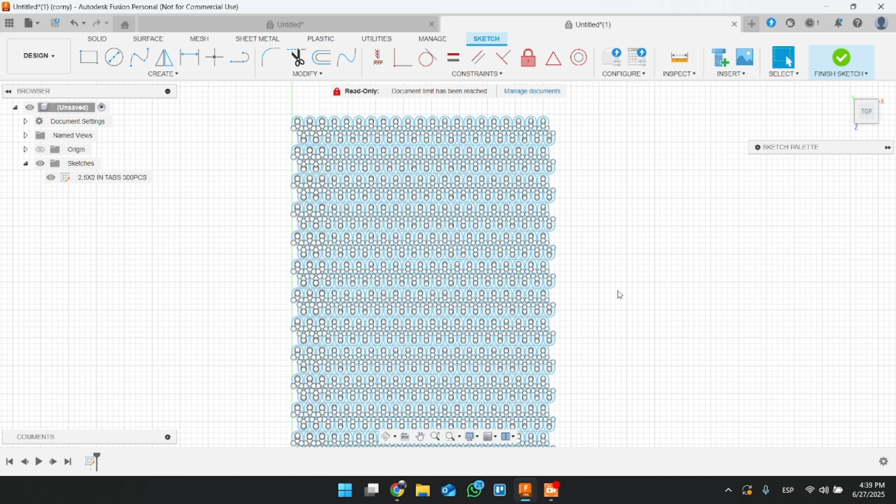In this video, I'm going to explain how to move a file from Fusion 360 to SheetCam so you can post-process the file to prepare it for the MASSO. It's fairly simple. There's a few steps, but if you follow it step by step, it's rather simple.

So I have some tabs here that I'm going to cut out. Right here we got our part. Obviously, at this point, you probably have some experience with Fusion, maybe not. If you don't, then you're going to want to go back to a video showing the basics.

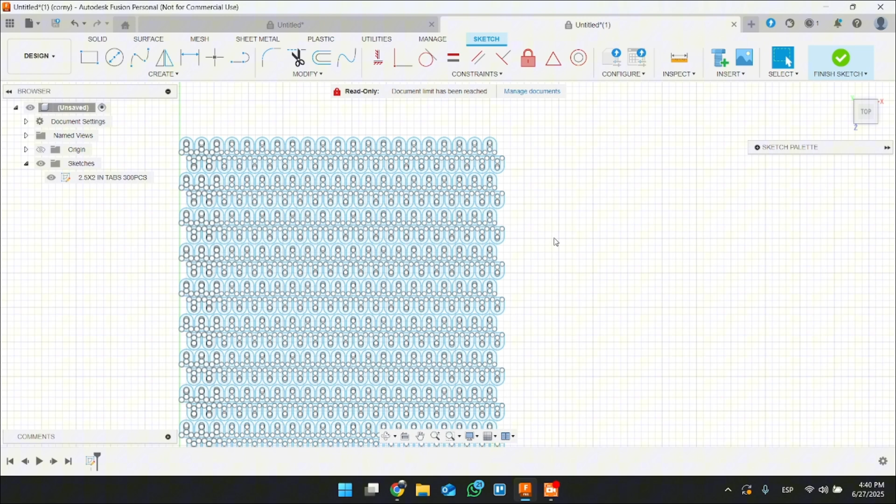On how to make parts in 2D for plasma cutter. So here we have some tabs that I'm going to cut. What we're going to do is we got them ready here. So we're going to right click on the part, on the sketch, and then hit Export DXF, and then click OK.

Project your points, so you want to use the points or not. I'm not going to use any of the points, I'm going to unselect that. Click OK. You're going to want to go to your folder wherever you have it. I have mine in CNC Plasma DXF files with a name. I actually have this one saved already, but let's just do it again.

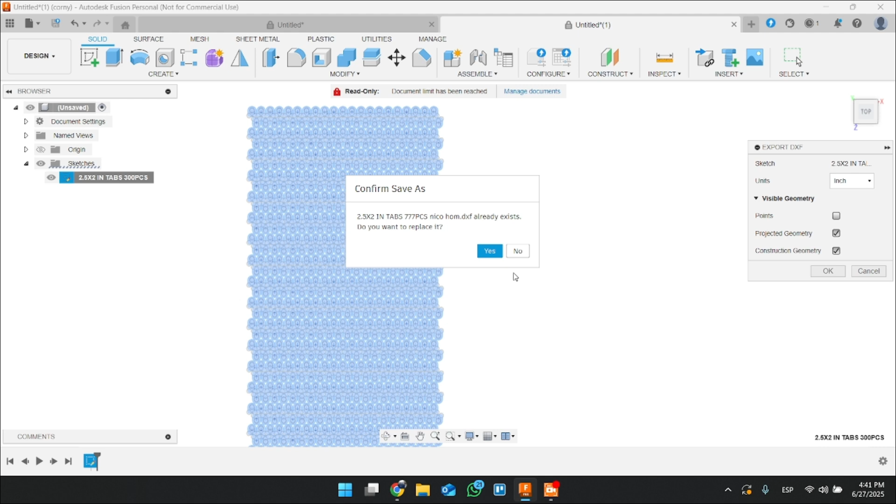This is 777, this one right there. And you're going to hit save, and hit save over here. It's probably not going to say replace on yours, but I'm going to hit replace. And we're going to go out of this one.

And then we're going to go to our SheetCam to show you how to import a part to SheetCam, your DXF file, and post-process it through SheetCam for the MASSO CNC plasma table, tube cutter, or pipe profiler.

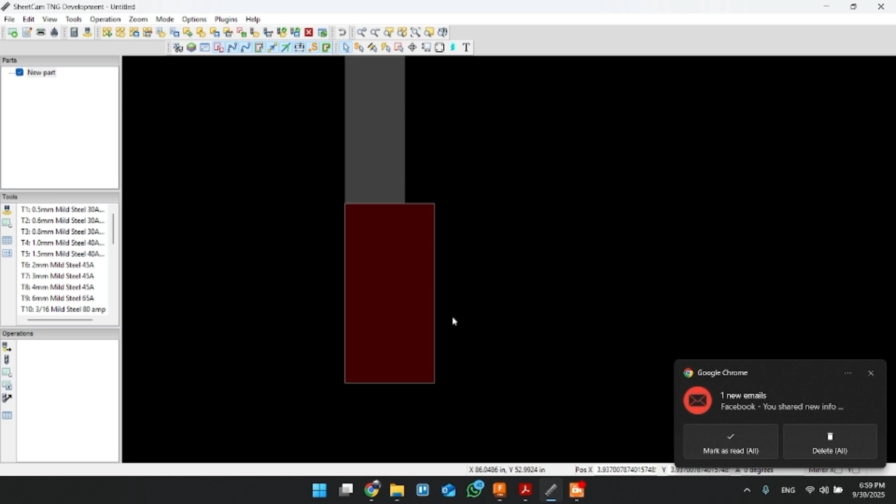What you're going to do is go to File. If you already have a job in here that you want to delete, just hit New Job and then click No if you don't want to save it, and it'll delete it. And you're going to go to File, New Part.

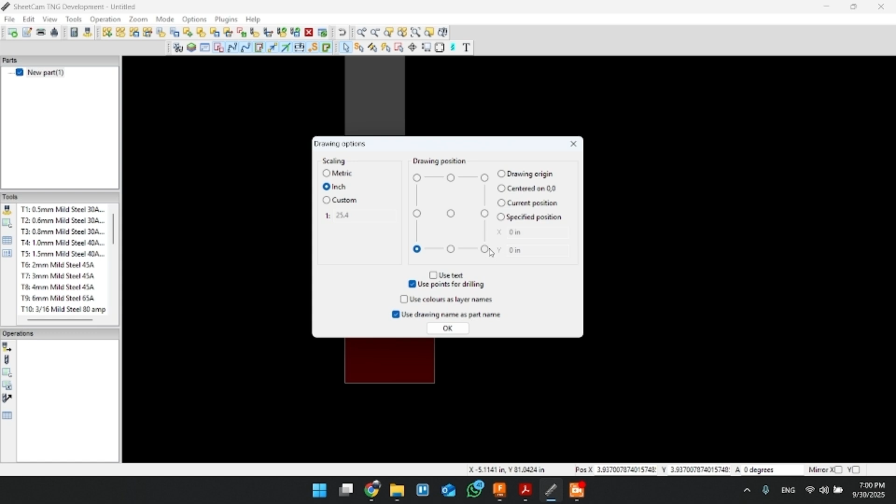Let's just pick that, hit Open. I want to make sure it's in inches, and this is the corner I'm going to start at, the bottom left corner. You can start on this side or wherever you prefer. Hit OK. There you go, I have my parts imported.

Now what I want to do is go down here to Operations. Left click that. Make sure we have MASSO default rules, you always want to make sure that that's there. Then you're going to select the tool you want to use.

So I'm going to be using, let's just say, 3/16 mild steel 80 amp. And then it sets the speed automatically. You can also go in here, if you don't have all these tools set, it's fine. You can check your book and reference it and just make sure path rules are there.

Touch off feed rate should be at least 150 to 200 between there. Cut volts at 0 - if you have this at 0 for the torch height controller, it's just going to use the piercing height to control the torch height controller. So I usually leave it at that.

It's easy to do, and you can use the lead ins over here. You can turn them off, but I like to have them on. You can make these longer, 0.5 if you want to, or 0.15 - make the lead in bigger that way so it won't cut your part when you're doing holes or something.

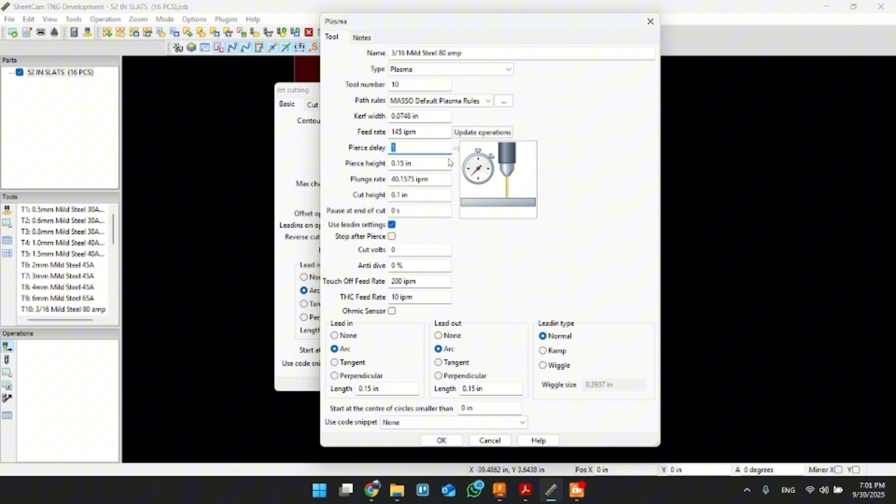The piercing delay is pretty important, so you got to check your chart for what that says. Kerf width, plunge rate, all that's fine. Cut height, I like to have it about 0.1 to 0.15, whatever that also you can check on your chart to see what's best for you. And we're going to click OK.

Make sure that MASSO default plasma rules are on, your rules should be on the left in here. If you haven't done that yet, go back and import all those rules, make sure they're all set up, otherwise your torch height controller won't work properly. If you don't have a torch height controller, you can ignore that part.

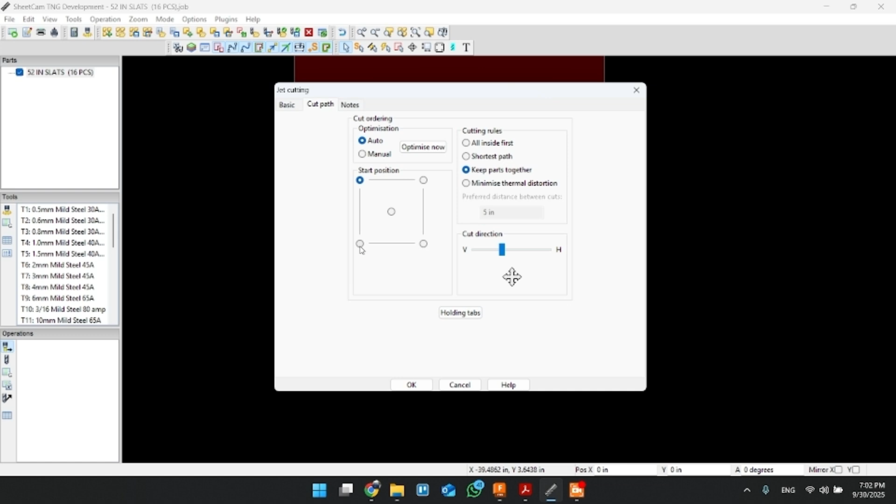And for the cut path, I'm going to start down here. So I'll click OK. There, it's processed now. It's going to go there, it's going to go to the part. I think over here is the next one.

So the next thing you might want to know is on here, edit start points. You can click that and then go back down above here and right click on your mouse. And we can do a quick cut sequence.

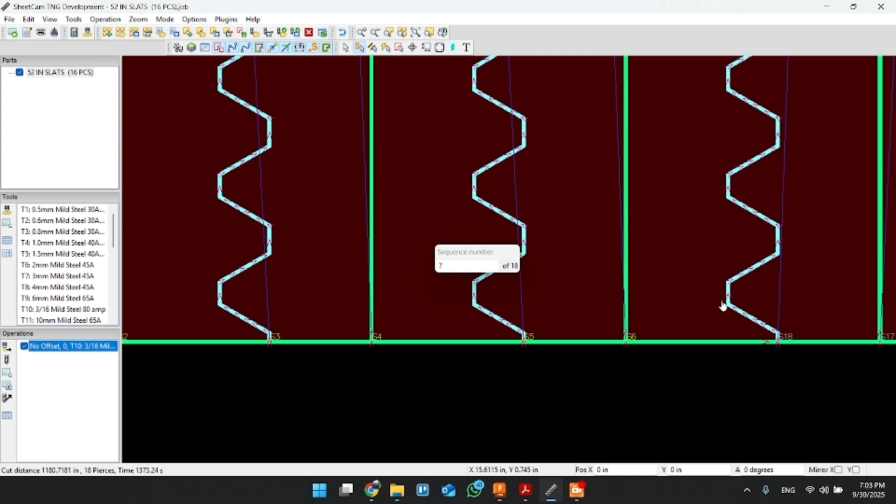On this one, we can set the sequence of however we want the parts to cut. Let's say if we want to cut in a row like this, you can click where the start points should be. You keep going, get them all set up wherever you want, whenever you're done, or you can skip one if you want. Whenever you're done, just right click and sequence, and then you're done.

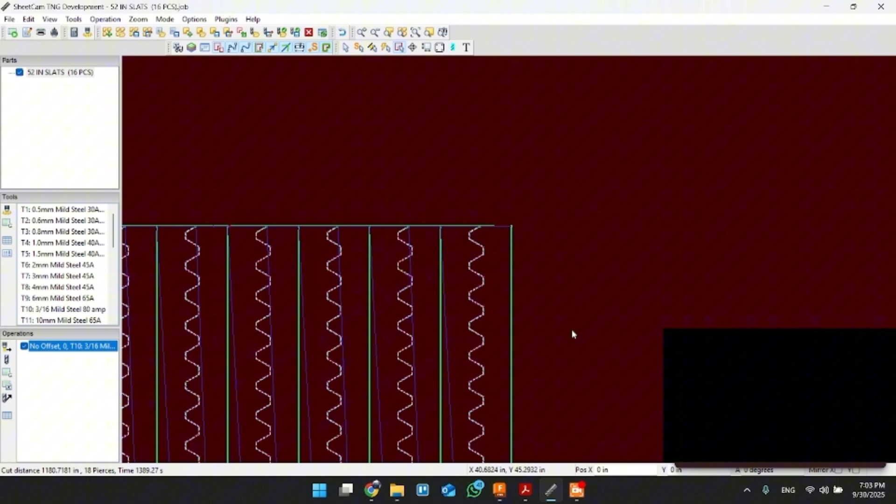Also, on edit contours, you can even use that to delete. You can slide over a part, right click, and then hit delete. Okay, it's not working right now. I might have to cover the whole thing. Let's try that - right click, delete. There you go, you have to actually drag over the whole piece to delete it. So you can delete that.

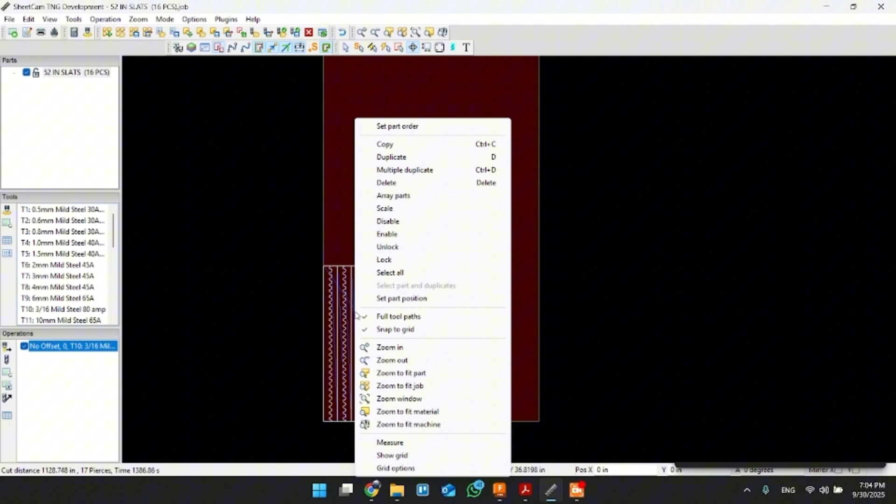And once you run this, you want to array the parts if you want to do more than one. What you can do is hit the nesting button, then right click. So you hit this nesting button and go down here to your part, right click, and you can duplicate it or whatever. If you want to just slide it like that, you can do that.

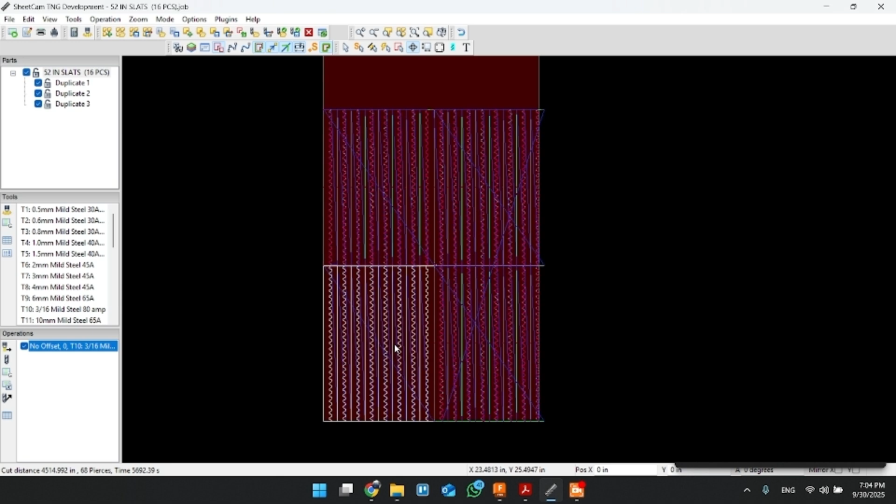And another option on nesting is right click, you can array the parts. So if you want to do, let's say, 2 parts, number of rows 2, and number of columns just 1. We can also do two columns, two rows. You can hit that, and it'll array the parts.

Let's hit that again and hit array. And then over here you can set how much space you want between the parts. I like to have them at least 0.2, otherwise it'll start messing with my other cut. You can change that however you want.

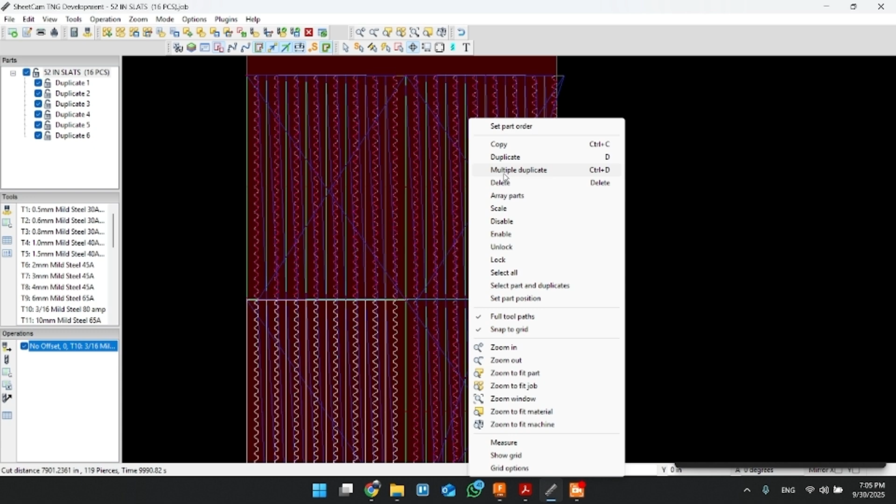And then another option here is you can just multiple duplicate. You can just drag it, keep and set a part wherever you want, and once you click OK on that one, it'll let you drag another one. So we're not going to do that now, but that's an option.

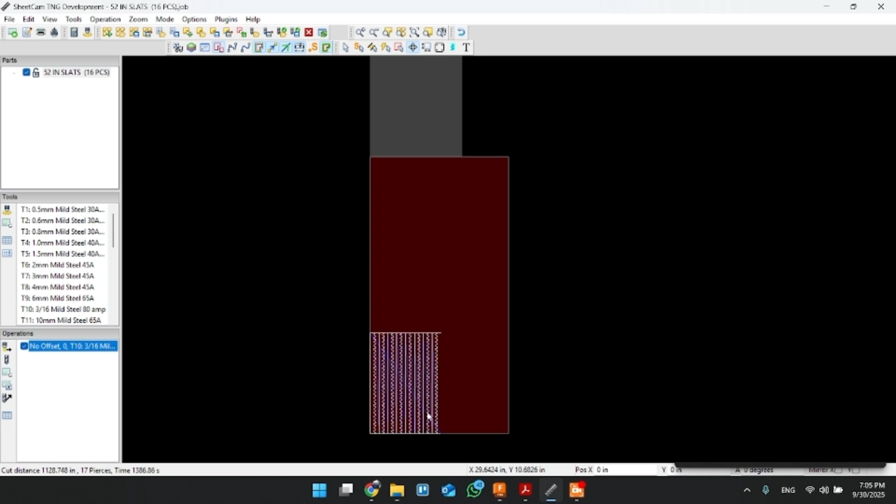So let's just go back. You can array those parts there. And basically once you've got your parts, let's say you just want to duplicate this one - we just want 2 parts here, right? Let's say we want that one right there. We can obviously always array it.

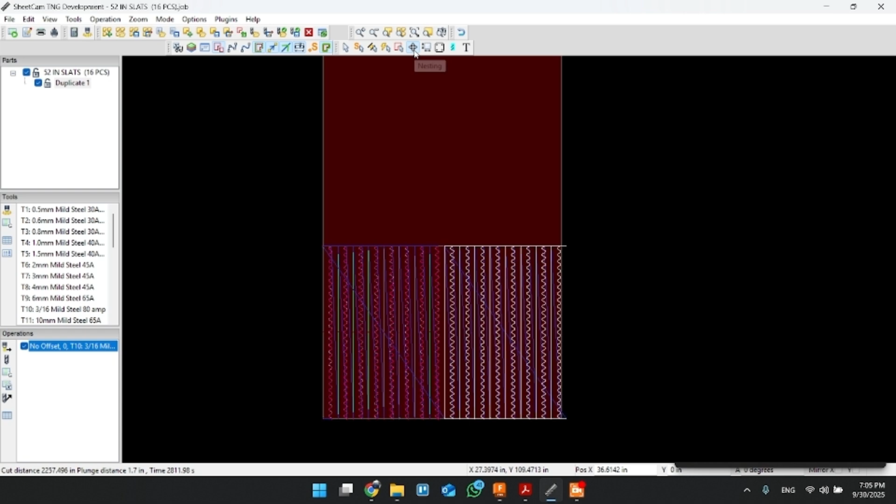Okay, that's done. Let's say we got our start point set, everything where we wanted it. So here in nesting, you can see the blue lines where everything's going to be, and the green lines - you can see the green is where it's going to cut, and it shows the arrows, the direction and everything. These blue lines are just travel.

Okay, so we're all set there, and now we're ready to export it. So we're going to run the post processor, and select our folder where we have it, let's say cut ready files. So let's just say we have our file here - just put them in your folder wherever. Test pieces, that's what I'm going to call it. And then we'll just hit save and hit OK.

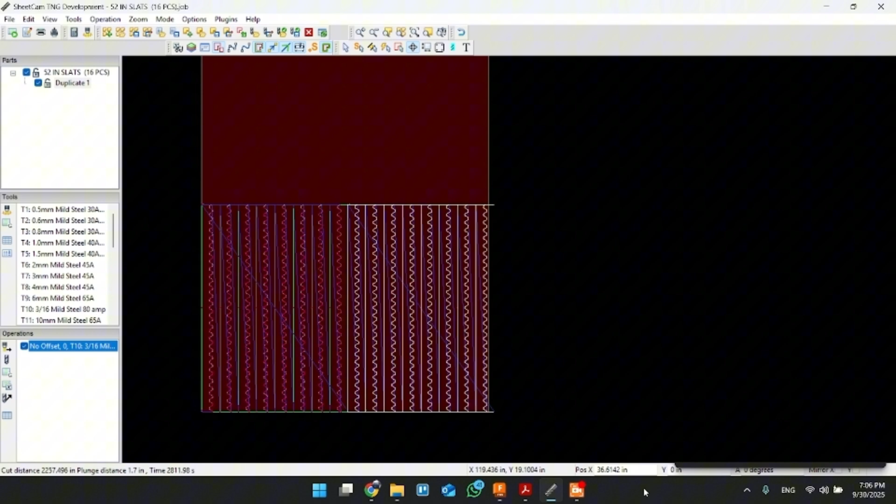So we got that done. Okay, let's go down to, let's see, open MASSO link. If you have MASSO link, you're going to now export it to your USB. So if you have a USB...

You will just select the file in here. So I selected that. What you're going to do is you have your link right here, and you're going to take it and drag it - mine's not connected right now, but you're going to take the file, drag it, and then send it. And then it'll show up at your plasma table. And that's pretty much about it.